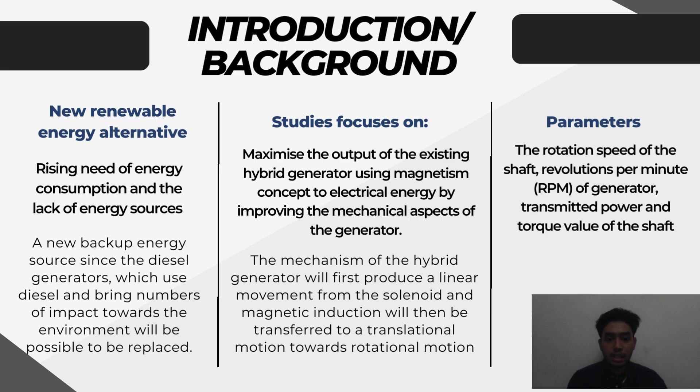The parameters that will be considered in the rotation are the rotation speed of the shaft, revolution per minute of the generator, transmitted power, and torque value of the shaft.

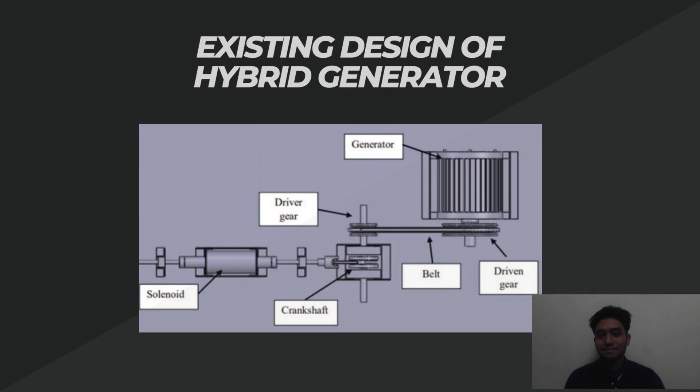Now I will elaborate some of the main points based on the literature review from numbers of articles or journals that I have summarized. The literature review is divided into four sections.

I will start with renewable energy in Malaysia. Renewable energy is growing rapidly and becoming a popular alternative source of energy. Malaysia is looking forward to achieving 50% implementation of renewable energy by 2050.

Environmental problems have been linked to sustainable energy development, which can be solved by switching from fossil fuel to renewable energy sources, including hydropower, solar, and wind.

In order to protect the environment and natural resources for an extended period of time, Malaysia's Ministry of Energy, Green Technology and Water (MEGTW) is stepping up its efforts in the areas of renewable energy and energy efficiency.

As a result, consistent efforts must be made to implement green technology so that people can alter their lifestyle to support a sustainable environment.

Thus, with the implementation of a hybrid generator, it enhances the capabilities of electrical supplies regardless of any Malaysian population, be it in the rural area or urban area, which will definitely bring a better impact towards the energy consumption in the nation.

So for the next literature review is Faraday's law, Lenz's law, and magnetic induction.

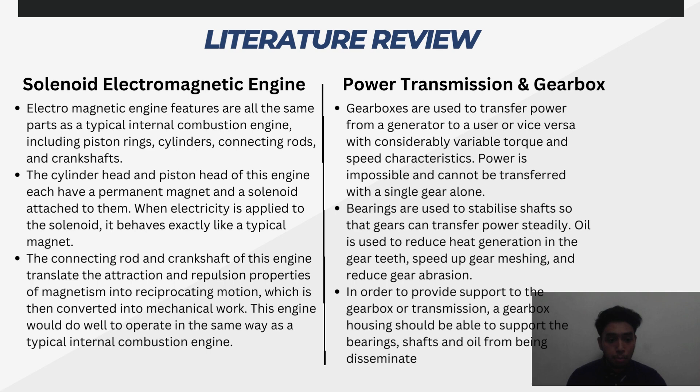The proposal of using a gearbox system on the hybrid generator will somehow increase the tendency of the output power for the hybrid generator to be maximized, while taking into account factors such as vibration, gear noises, and gear failure for continuous usage of the system. In general, gear trains need to be able to carry enough weight to function well in a particular application, such as to maximize the output of the hybrid generator using magnetism application.

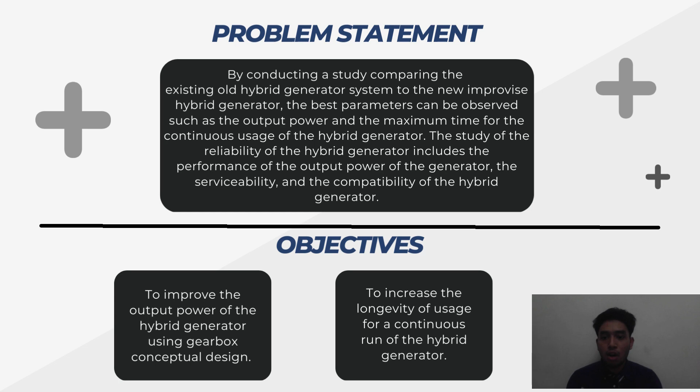The problem statement of this project is to conduct a study comparing the existing old hybrid generator system to the new improvised hybrid generator system. The best parameters can be observed, such as the output power and the maximum time for continuous usage of the hybrid generator. The objectives of the project are to improve the output power of the hybrid generator using gearbox conceptual design, and to increase the longevity of usage for a continuous run of the hybrid generator.

For the scopes of the project, focusing on the designing and improvisation of the existing hybrid generator by using conceptual design in CAD software CATIA V5. The designing process of the gearbox of the generator consists of different parameters such as the diameter of the pinion shafts, number of gear teeth, and many more.

The output power generation by the hybrid generator, with the usage of the gearbox, needs to be investigated and compared. Next is the limitation of the project, which is the lack of studies or researches for references for the improvement of the hybrid generator using a gearbox system.

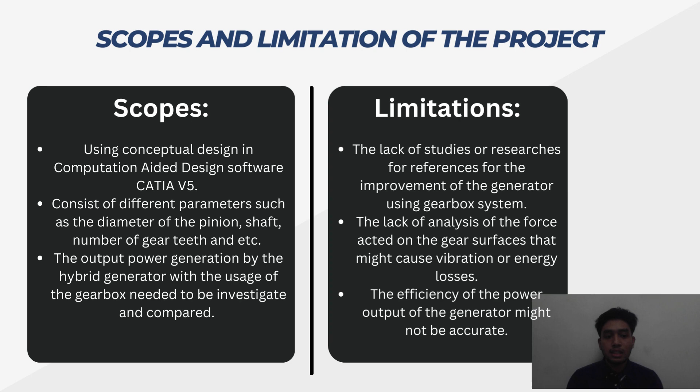Moreover, there might be a lack of analysis of the force acted on the gear surfaces that might cause vibration or energy losses. Finally, the efficiency of the output power of the generator might not be accurate due to the difficulty in determining the type of energy losses that might occur using different types of gearbox.

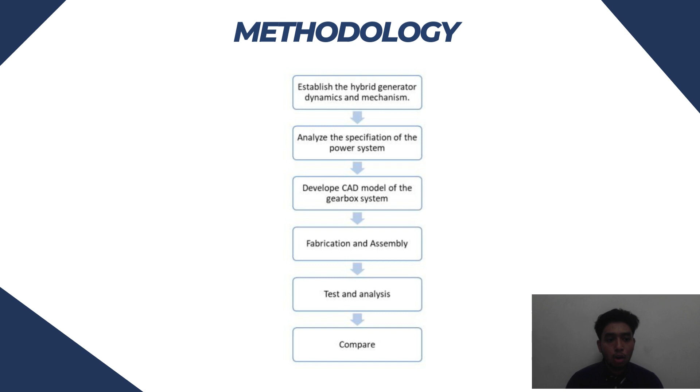The first gear will be connected to the crankshaft and the fourth gear will be connected to the generator. Meanwhile, the second and third gears are known as the idler gears, which are used to reduce torque and increase the power transmission.

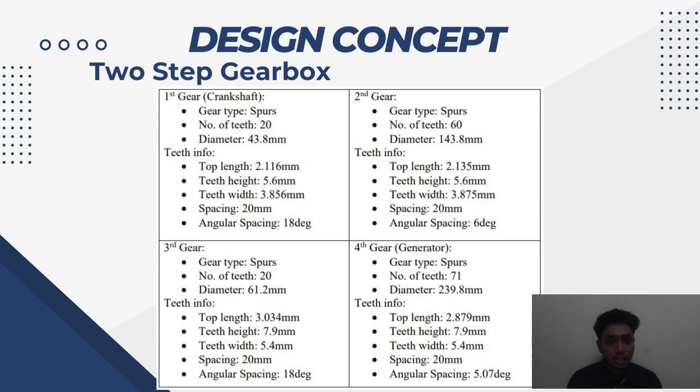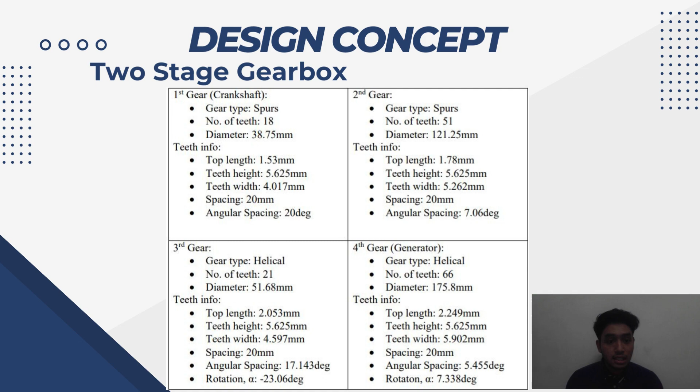This is the description of the second design, which is the two-stage gearbox, where the first spur gear will be connected to the crankshaft while the last, fourth, helical gear will be connected to the generator.

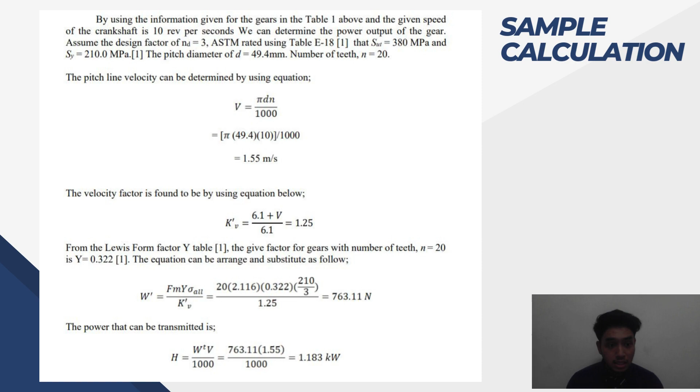Here are the sample calculations taken in order to calculate the power that can be transmitted to the generator from the gearing mechanism, by referring to the mechanical engineering design books that consist of ASTM rated tables, and following the equations and parameters obtained from the description of the gearbox.

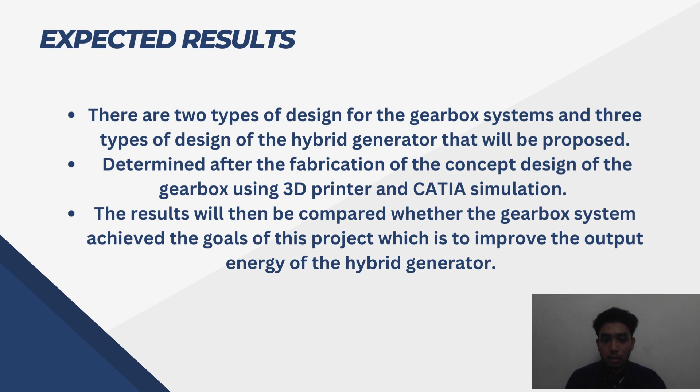For the expected results of the project, there are 2 types of design for the gearbox and 3 types of design for the hybrid generator that will be proposed. The result of the output will be determined after fabrication using CATIA and a 3D printer. The results will then be compared to determine whether the goals are achieved for this project.